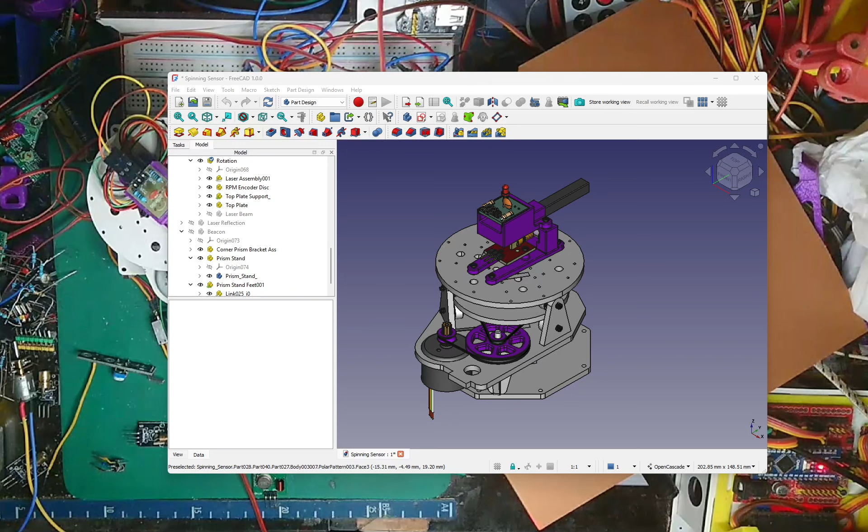What it is: a little rotary table that rotates, with a small laser down here. This shines through a cylinder lens, and what this does is create a laser beam that shines a line.

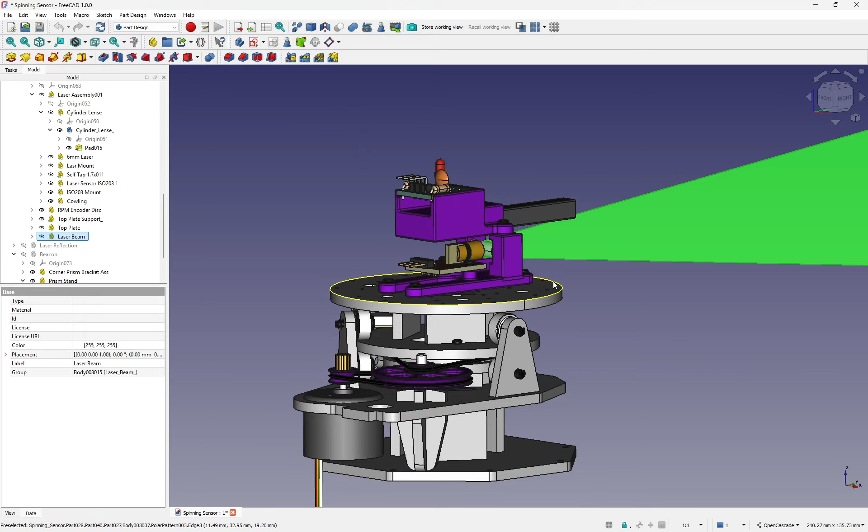So I'll just put that laser beam in there so you can see what it does. If I turn on the laser beam, the point laser, going through this cylinder lens, creates a line laser. So if you look on top, it's still a straight point in this direction, but the laser light has been spread out, so it shines a line on whatever it touches.

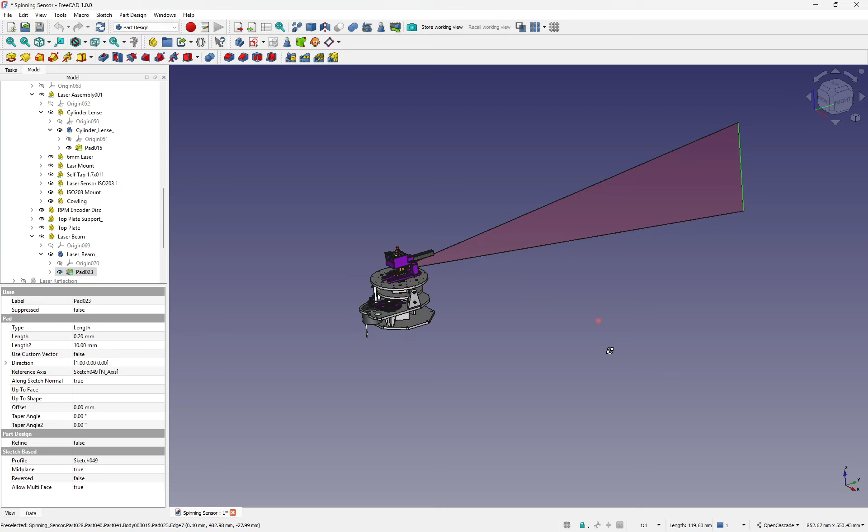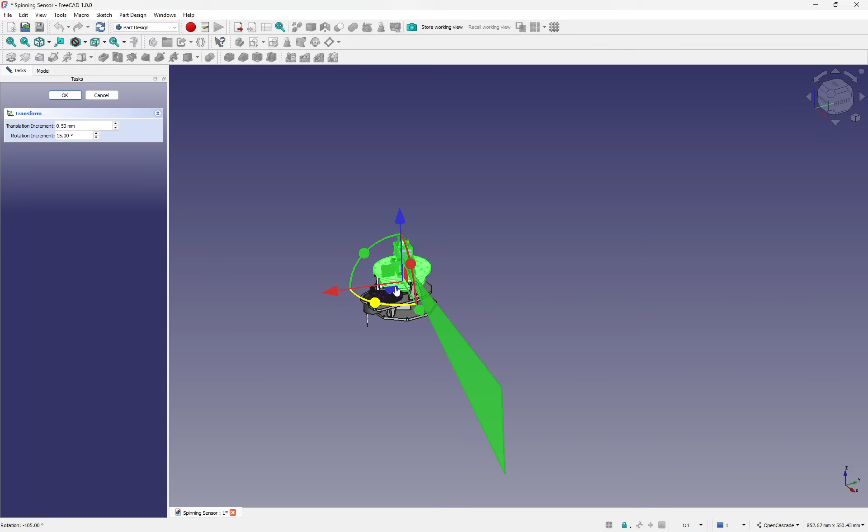And then what this does - let's have a look, laser beam, rotation, there we go. So what it does is it spins around like this, going around and shining that light as it goes.

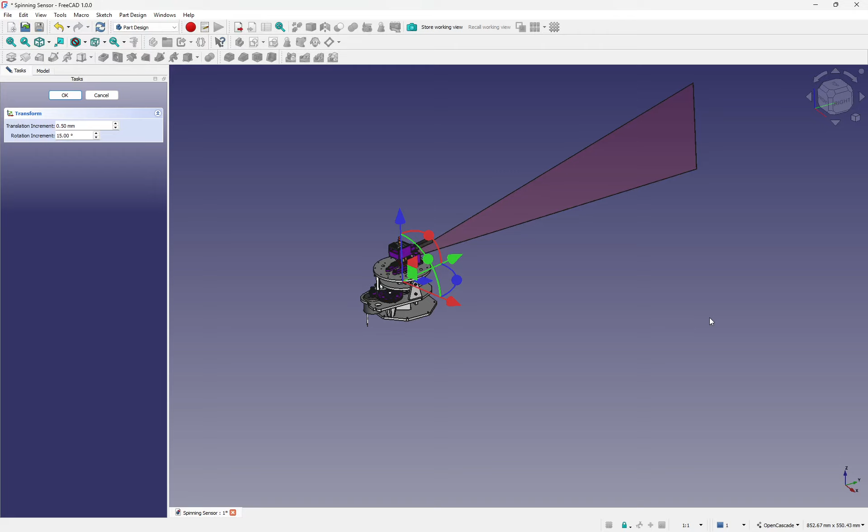And so what we do is we place 3 beacons around this module, which is going to be mounted on a robot. Basically what this does is find the position of a robot by shining this laser light on 3 beacons, which then ping a signal back to say when it has detected a beacon.

What I'll do is - this is all based on a friend's Instructable. I'll show you the Instructable because it will give you a better idea of what it is that we're doing.

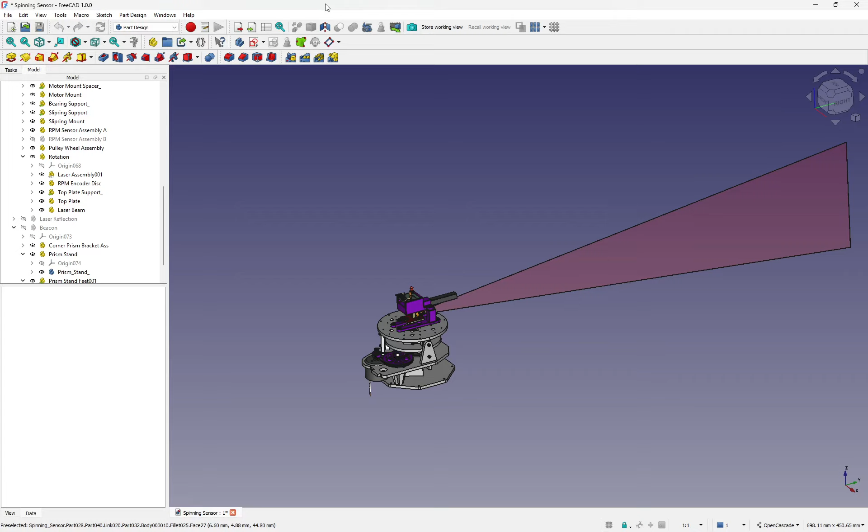So yes, I recommend taking a look at this Instructable. Just go to Instructables and search for this robot triangulation using circumcircles. He's done a very good piece of maths which will calculate its position using triangulation using circumcircles.

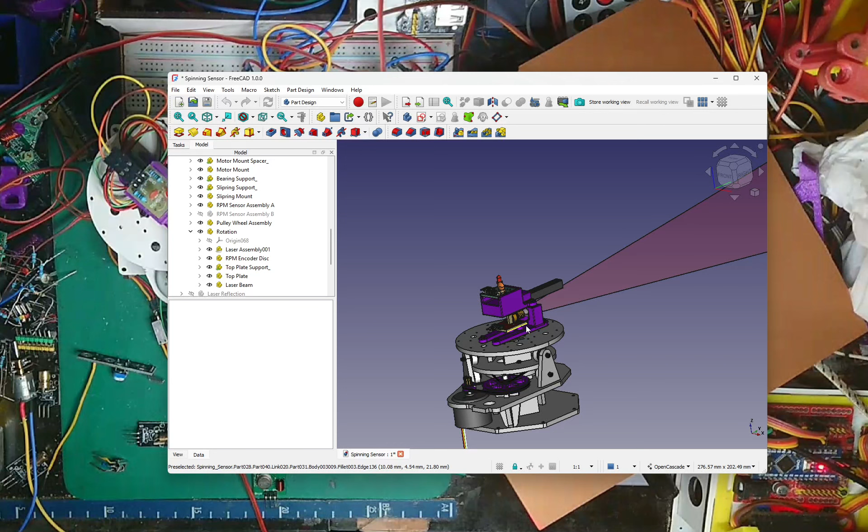So mine isn't really a passive turntable. I can actually connect things to another microcontroller that are mounted on this turntable. That's why my turntable looks a bit more complex - because I'm actually rotating things around some wires going through a slip ring, so I can connect things that are on this table.

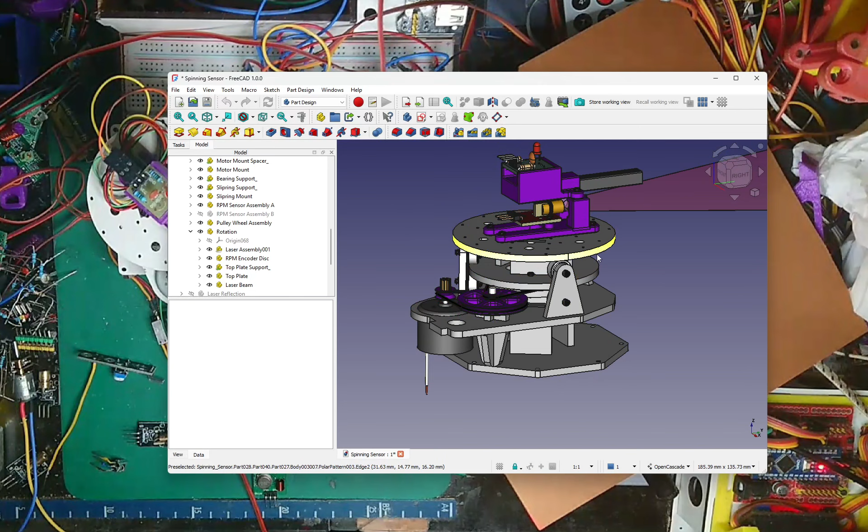And this is what it is. I'm using an ESP8266 as my microcontroller, because what I can do is run a web server. One moment - yes, there we go.

So I'm using this ESP8266 because it's got a web server on, and what I want to do is use a web page to display all the information that this is collecting basically.

Now, as I was saying before, it's been a while, because what we've been doing is trying to use these 433 megahertz radio transmitters and receivers.

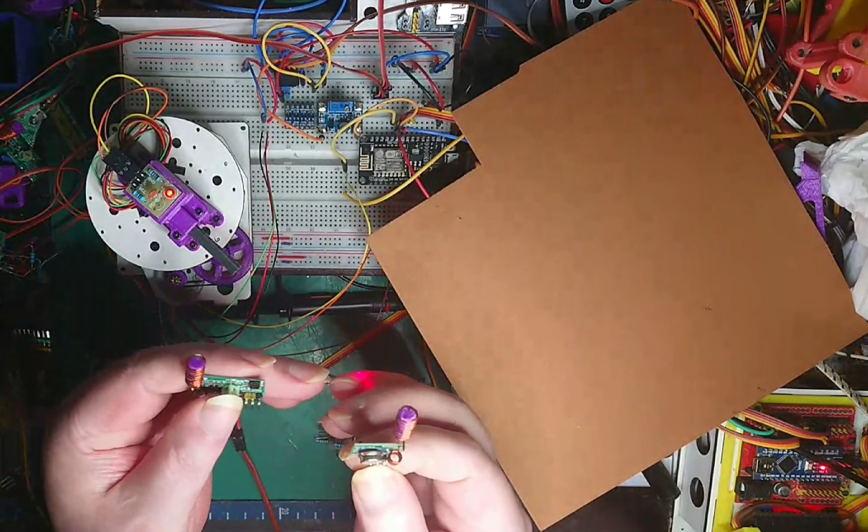I've done a video about an issue that I had with these, where the pins were actually shorted to ground, and I've removed the crystal. If you search my videos, you'll see a modification to fix this issue - if you test the output to ground and there's a short, it's actually underneath the crystal, and you need to take the crystal off and replace it.

But anyway, so what we're trying to do - let's just move that there. So that would have been tied with a sensor. So we'd have our sensor that picks up the laser coming from when the laser hits it. Can I get that? So it shows a laser.

Yeah, so when the laser hits that, what that would do then is send a signal via the radio on this 433 megahertz radio, and there would be 3 of these. So as it spun round, it would trigger 3 of these, and these would be sending a signal back to our receiver.

Now these are pretty basic receivers. I'll just bring a circuit diagram up, because what we were getting was, because there's such a large time delay between each pulse, we were picking up a lot of noise, which then in turn triggered the microcontroller.

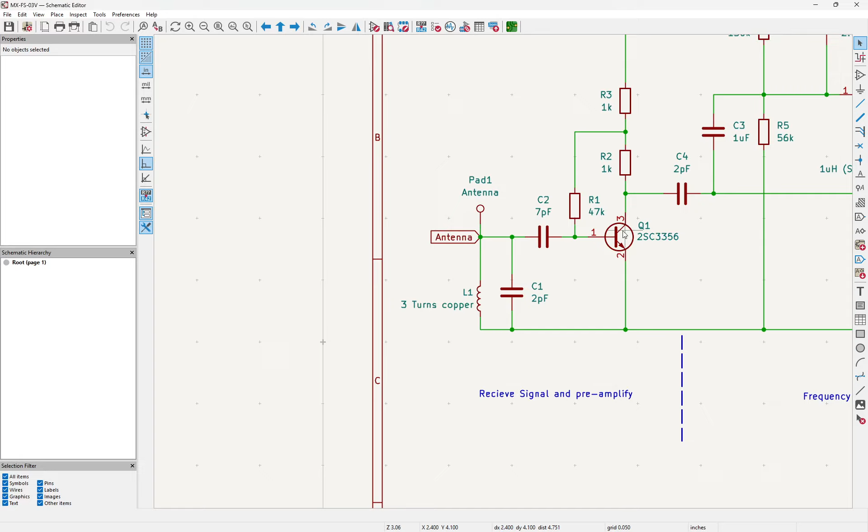This is amplified, and then it goes through demodulation where we have a matching frequency set up here, which then they merge together, so we detect the signal that we're actually transmitting. But then it goes through this filter, and the filter is pretty basic - it's just a capacitor and a resistor.

And the values of these only give you sort of a pulse width of about, I don't know, about 100 milliseconds or something, and then it just starts getting corrupt because of the capacity. Basically, it acts a bit like an RC circuit, but it's more of a filter.

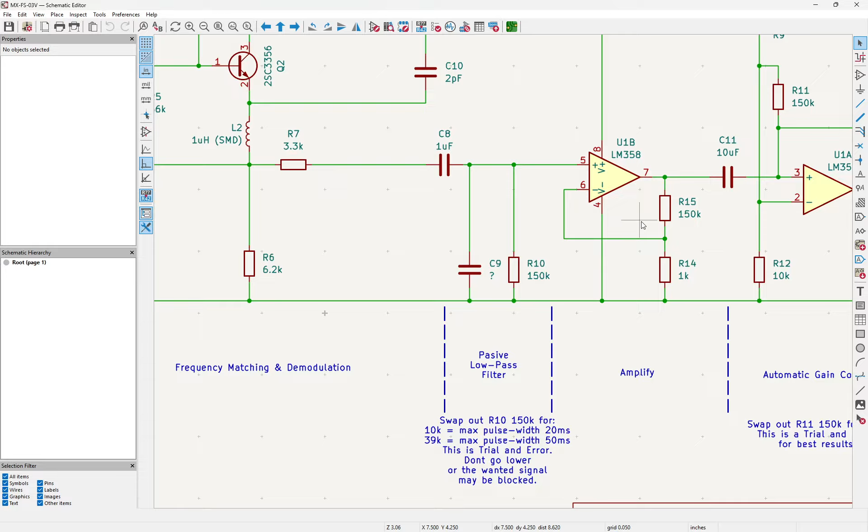And then it gets amplified. After amplification, this has got an auto gain, so when it's quiet it sort of bumps it up. What I've done is I tried modifying the gain to give it a cap, but that didn't work. I also reduced the pulse width of the signal, so it would only accept signals of a pulse width less than about 20 milliseconds - anything more than 20 milliseconds it would ignore.

And it sort of worked, but at that point we were having another issue. So I gave up with them because I was having headaches trying to overcome the noise from the signal, and eventually, in hindsight, what I found was that the majority of it was down to ambient light from the sun.

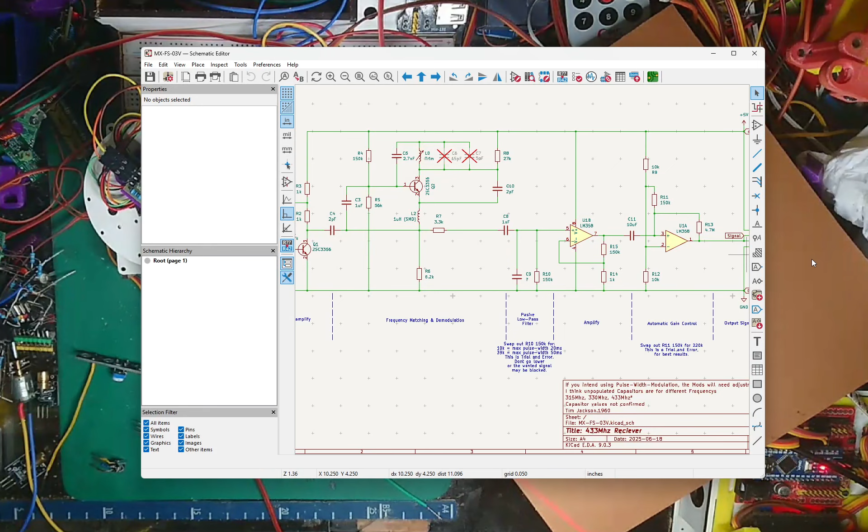I didn't notice, but when the light was shining through the window - these sensors, where are we? Yeah, these little sensors - let's get some focus on that. Yeah, I've painted it black.

Well, the transparent one actually - I don't know if I've got one. No, I haven't got one to hand. But they come transparent, and basically the plastic is supposed to filter the wavelengths you don't want. But I found that sunlight has every wavelength under the sun. So anyway, that's why I painted them black, apart from the lens at the front.

And so what was happening was when the sun shone and it reflected around the room, this was triggering from that. If I'd noticed that earlier, I would probably still be going with these radio transmitters. But I've moved on from there - like you do, you keep iterating and go from one thing to another.

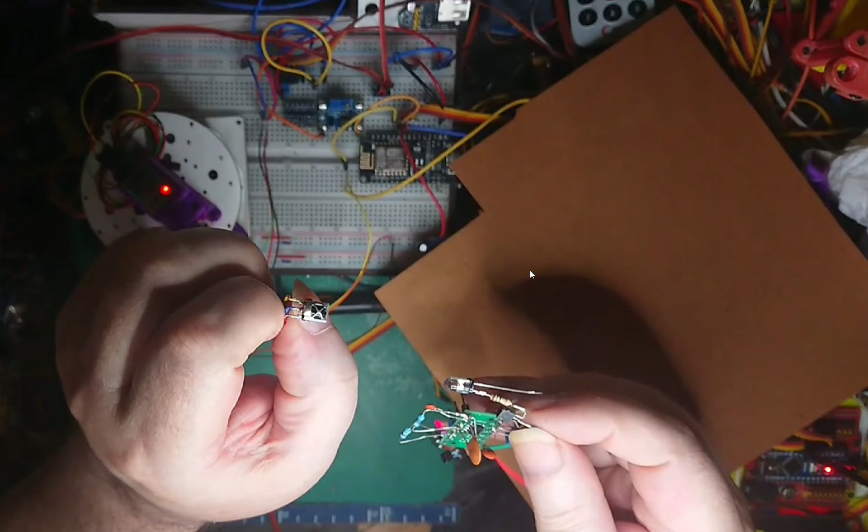Basically, it's a carrier for the infrared, so this will then transmit at 38 kilohertz. And because it's transmitting at 38 kilohertz, I can use one of these receivers, which is a standard NEC receiver, which has a filter to filter out other light sources apart from infrared, and it has a demodulator inside to demodulate the 38 kilohertz to a single pulse.

So basically, I'd changed from the radio setup to infrared setup, and this was working quite well. But of course, I hadn't realised that this was the issue with ambient light. Anyway, so I was still getting exactly the same interference.

So then what I did, I went a different way again. Instead of this picking up the signal and sending it through this 555 timer to create a carrier wave for the infrared LED to be picked up by this, I'd have three setups of this and just one of that.

It just hit me that I can put this 555 timer and pulse the actual laser. So the laser is being pulsed - let me just get a focus in there. Yeah, so I was pulsing the laser through this at 38 kilohertz.

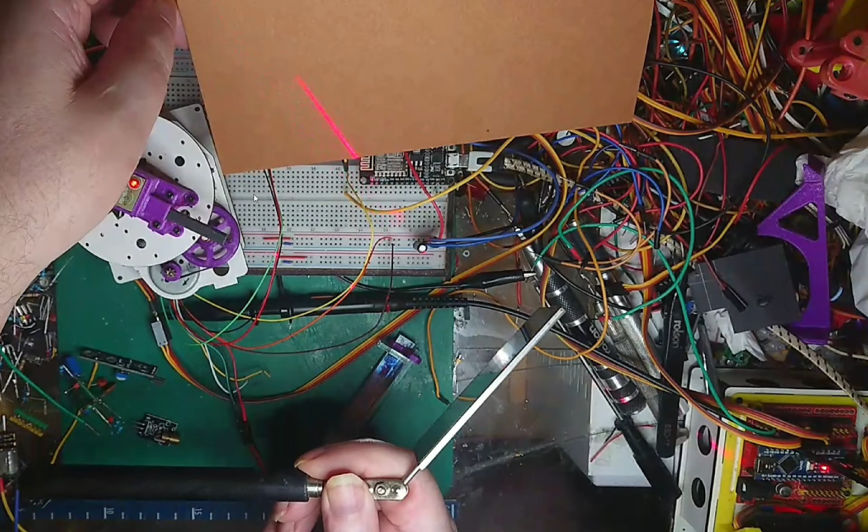And then when they hit a mirror, if I put a mirror here, let's get it in shot, if I put that there, and my laser light will come - let's just get that sort of right, there we go. So my laser light comes out of here, hits my mirror, and then gets reflected back.

But the next step is to get the light - when this laser rotates, you can see that the light is reflected back in exactly - let's see if I can get that down there. Is that showing up? So I've got my laser light coming.

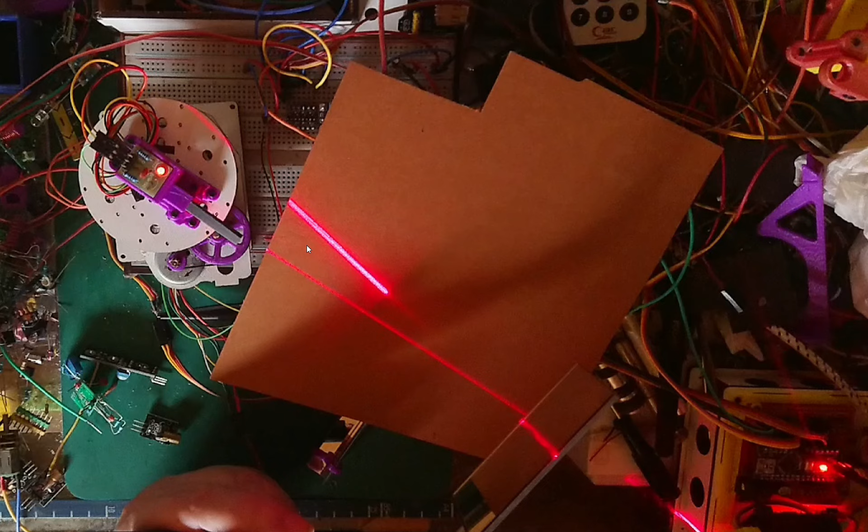I'll just turn the light off for this bit, then it'll show up a bit better. Let's see if I can just get a bit not so dark. Alright, try and get it to focus on something. Nope. Right, that's better. Right, we'll leave it at that.

So as this rotates, my laser light is rotating round, and you can see that it's going into the mirror. And if the laser is not lined up perfectly, let's just move that round a touch. There. So you can see that the light comes in, hits the mirror, and then gets reflected off.

But as the turret rotates and it becomes aligned with the mirror perfectly at perpendicular, you can see that the light is being shone and comes straight back.

So then this sensor will then activate, knowing that I'm in the exact position. So as it comes across, you can see the laser light going, it hits and activates and then deactivates as it continues. I hope you can see that. But we have an issue with this.

Because the robot is going to be moving around, it can be in different positions relative to the mirror. I'll move the mirror to show what happens. If the mirror moves, if the robot moves, you can see the reflection changes as the robot moves, and basically the only time it's correct is when it's perpendicular, at 90 degrees to the light. If the robot is at an angle to the mirror, this isn't going to work, because it won't hit the mirror and line up.

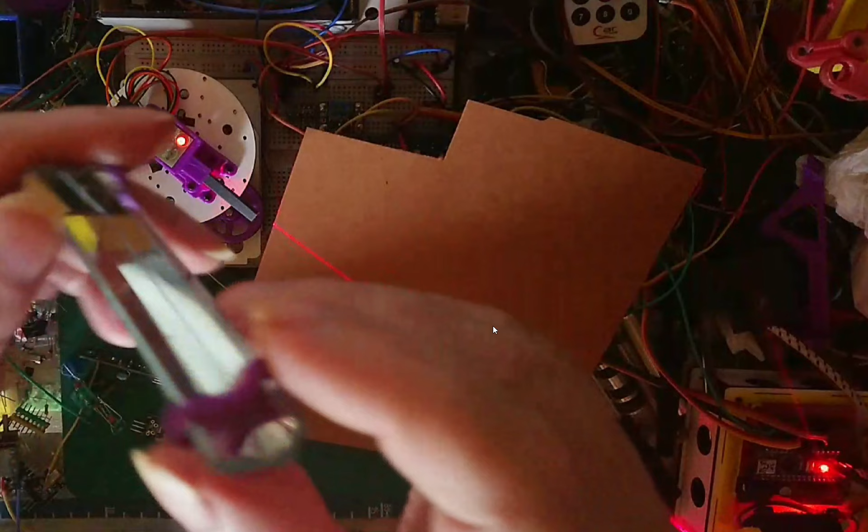So there's a special mirror we can use. To show this, I'm going to go 2D first. Can you see this? This is a mirror - actually two mirrors, held together. Let's turn my light back on now. Oops, sorry, I've just blinded everyone. There we go. So we've got this mirror, and I've held two mirrors together at 90 degrees to each other.

This is how cat's eyes work. You know the cat's eyes in the road? When you're driving down the road and your headlights shine on a cat's eye, the light is reflected directly back towards the source of the light. This is how cat's eyes work - you can either have a round one or two flat ones.

I want to try and demonstrate this and show you how it works using my laser. I'll turn the light off again and try to get a decent colour temperature - I think that's more like it. There we go - nope, shouldn't have clicked. Let me try and get onto this board.

Has that got it? Yeah, it looks a bit crap, that, doesn't it? Anyway, you can see the laser quite well. So obviously this mirror, if I hold it horizontal, we can have it in that direction or in that direction. If we have it in this direction for the laser to come, I should be able to show it.

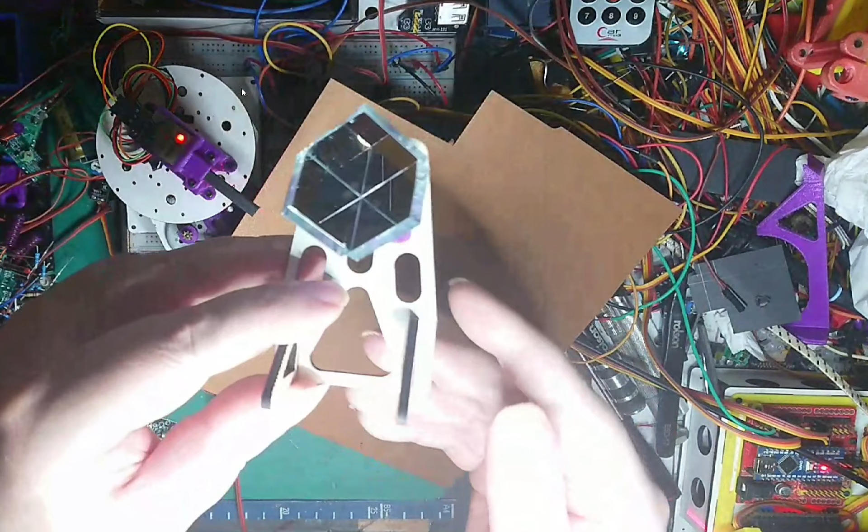These are my beacons, and these are my mirrors. Now I am going to put this underneath the camera. I don't know if you can see there, but let's see if I can focus on it because it's the camera lens I want to show you.

I wonder if it'd be better without... I don't know if you can see there, but in the middle of that is my camera lens, right in the middle, because basically any light - you can see a few images of it. I don't know, maybe I should put a ring around the camera lens. You can sort of see it there in the middle, the whitish bit is actually my lens.

Now if I tilt this, the lens, the camera is always going to be in the middle, because the light shining to the lens, or the reflection of the camera, will always stay in the direction that the light comes from. So basically, what I'm trying to show is that this lens can be at any angle to the laser that's going to come out and through here.

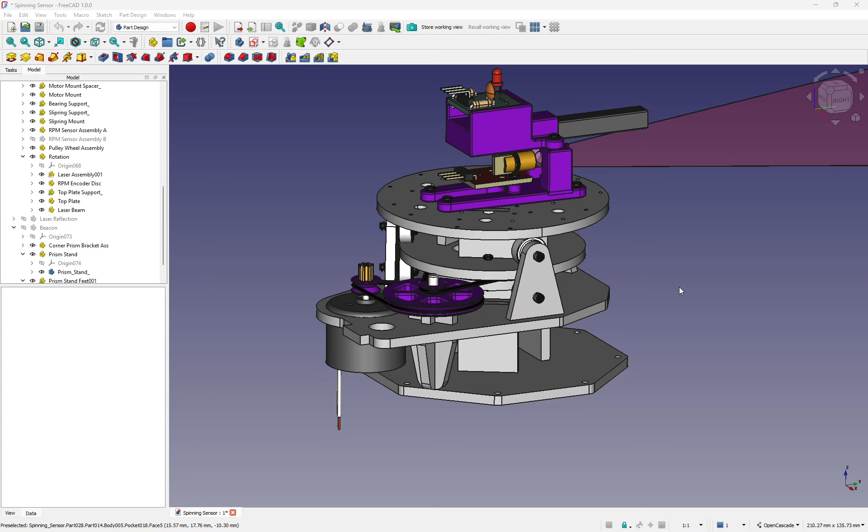Just give me a minute. Right, okay, let's see if I can show it a bit better on my CAD. Hopefully I can show it better here. So the setup I've got at the moment - I've got my rotating table, and I've got my laser coming out, giving this line of laser light.

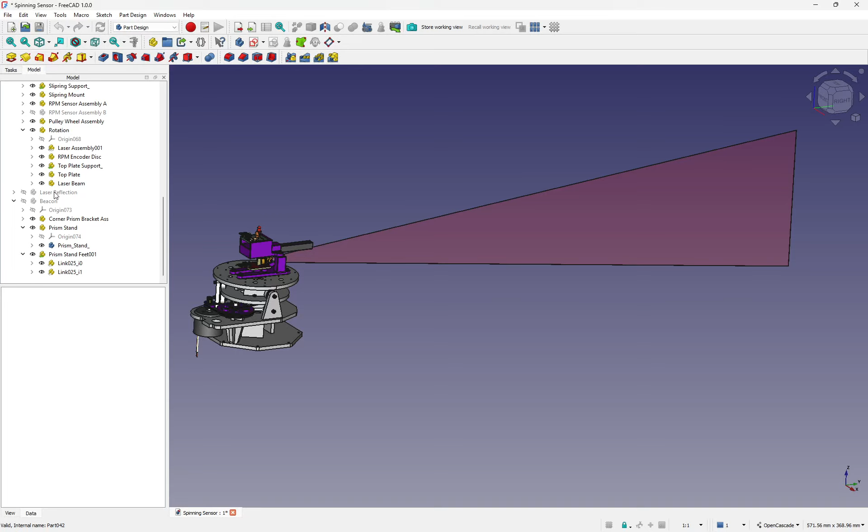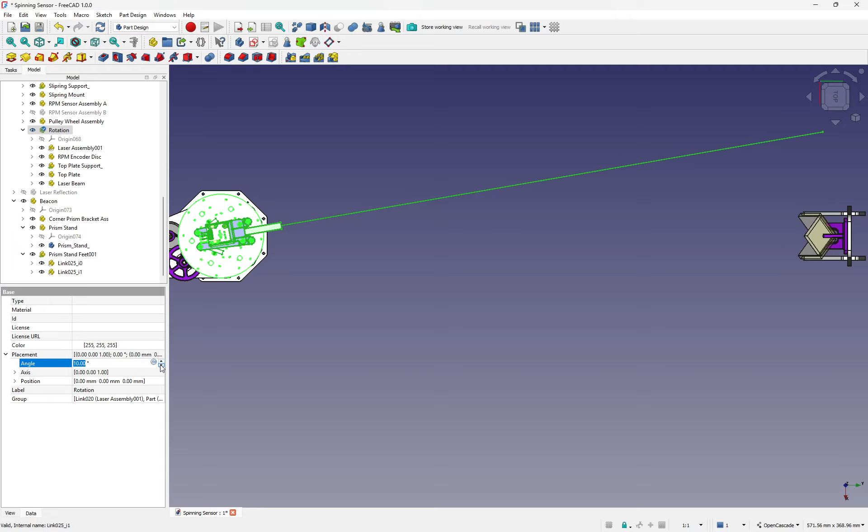And then what we can do is I can put my beacon in front of this laser light. So if we look on the top, we have our laser. Let's just go like this. So as my laser's turning, it will actually hit the - let's call it a prism for the sake of it.

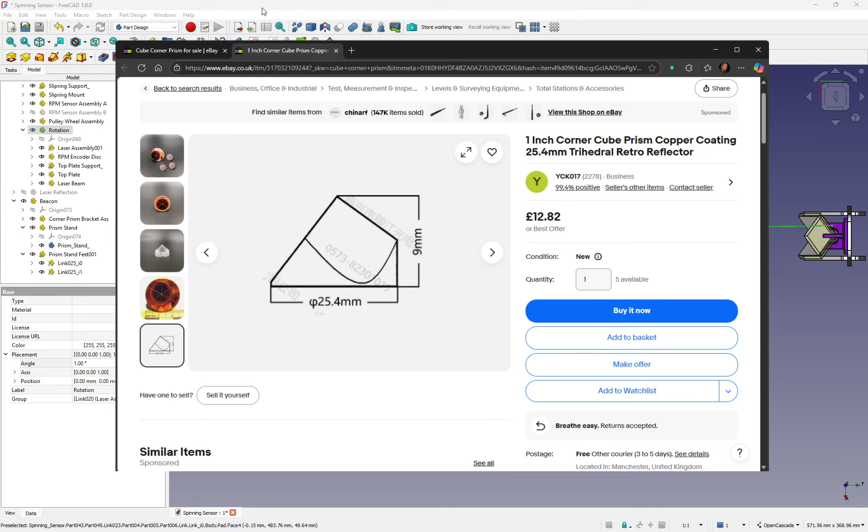It's 3 mirrors, but let me just show you one moment. Yes, these are what they are. What you can actually do is you can buy these - the thing is, they're a bit on the pricey side. Oh, you can see it better there. Basically, this is a prism where you've got like 3 sides that have been ground away to form the internals. So that, if you can imagine, this is a prism.

But I need 3, so you're talking 38 quid there for these. But I actually had some mirrors, and they're actually special mirrors. Let me just see if I can.

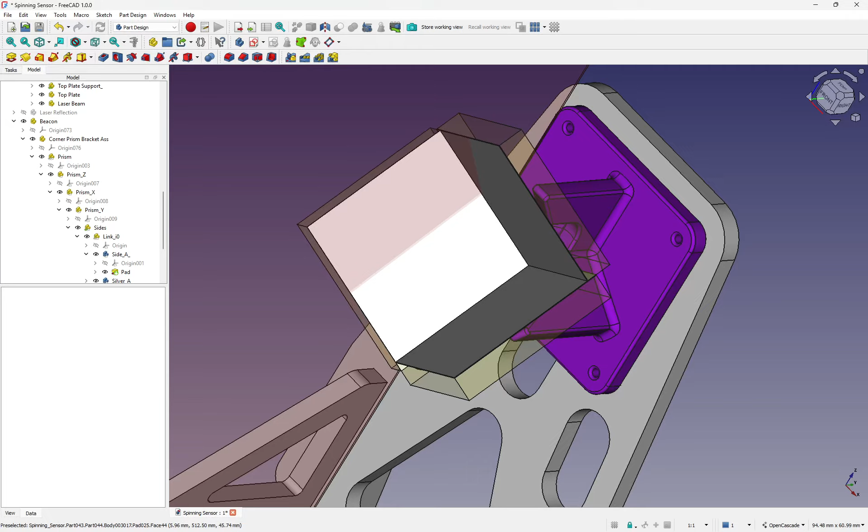They're called first surface mirrors because the actual surface is on the front and not the back like normal mirrors. I got these out of some old flatbed scanners back in the days when it was all SCSI and stuff - really old flatbed scanners, not today where we've got LEDs. This is before the days of LEDs. I got these out of old scanners when it used to be the cathode, the fluorescent tube and mirrors reflecting. I've actually made these up myself because I had them, but as I say, you can actually buy them, and these are what they look like. The price is stupid, I would have thought they'd be a lot cheaper by now.

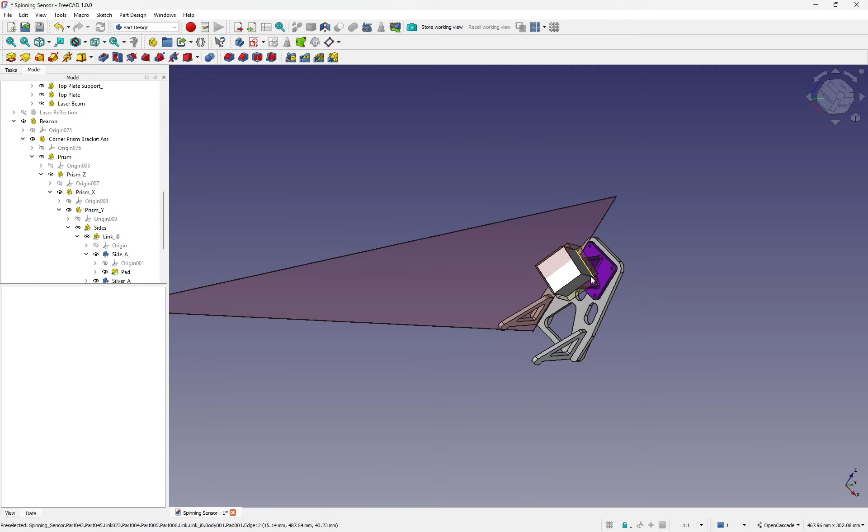Anyways, so let's continue. I just wanted to show you what they are, and that you can actually buy them instead of having to make them. So if we look on top, as the laser comes in...

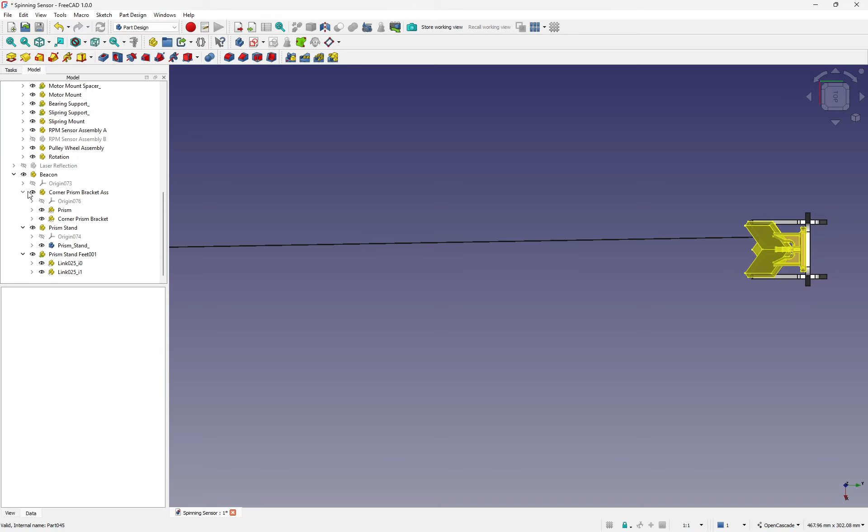The light is going to be shone exactly the same direction it comes in. So if I put on the reflection, where are we? I've put this somewhere - that's my rotation, that's my beacon. Oh, laser reflection, there we go.

So yes, if we take this - where are we, there we go. Right, so as it hits the mirror, when it hits the mirror, there - oh hang on, can I make that not 0.1? When it hits the mirror, there, let's make that 1. It's the mirror there - it's going to reflect exactly back the way it came.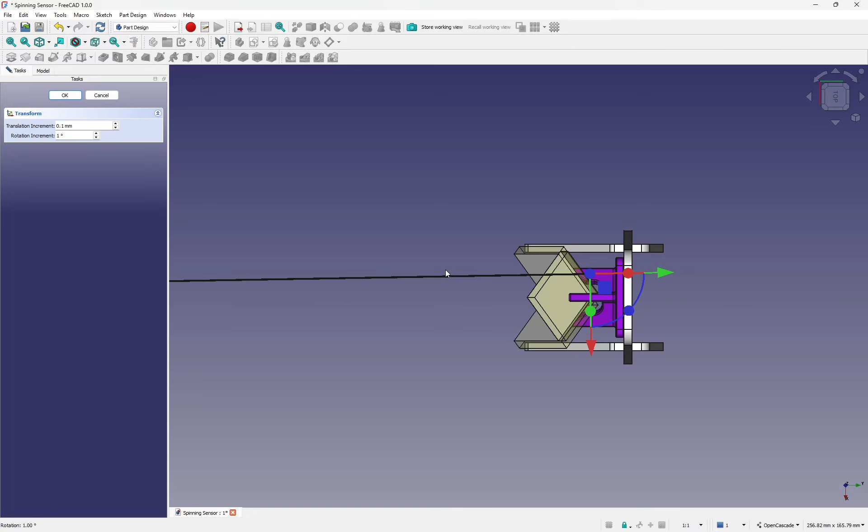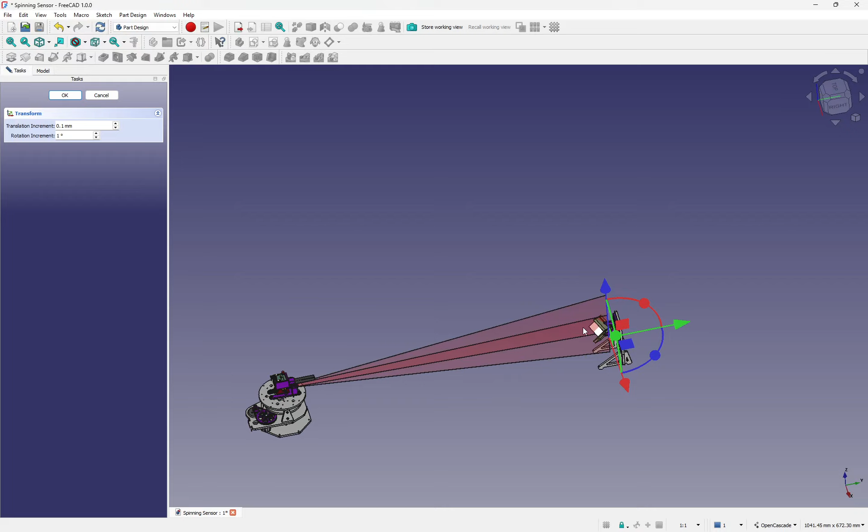So it's going to come back right into this sensor. As soon as it hits the mirror, it's going to reflect around and come back exactly in the same direction. Well, actually, it's not - sorry, I've got that wrong.

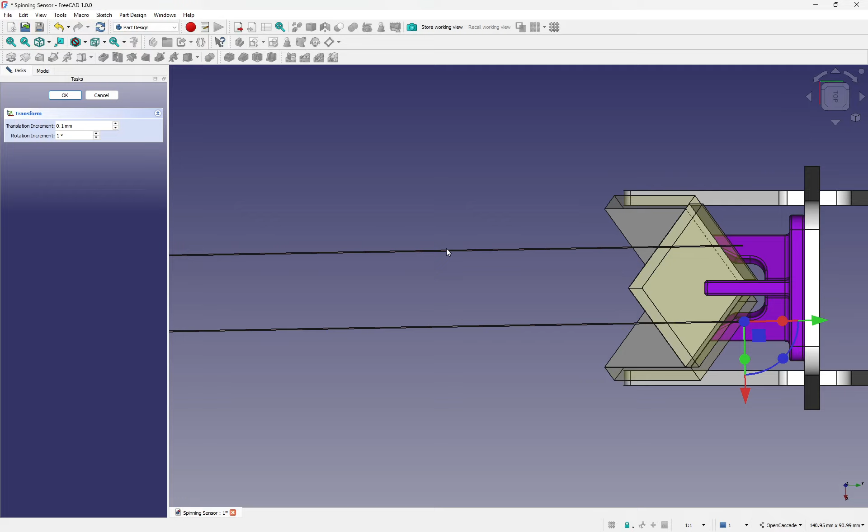Right, when it hits the mirror, it's going to be coming back in the same direction it's coming from, but when it hits it, it'll be there to start with. So if you imagine my sensor is in the same place as the way I'm sending it out, that sends the light outwards. It reflects off this mirror here, or it could be this top mirror, and it goes down to the bottom mirror, but basically it goes in and then comes across to this mirror, and it comes back in exactly the same direction it's coming from, but it's slightly offset because it's on this side of the mirror.

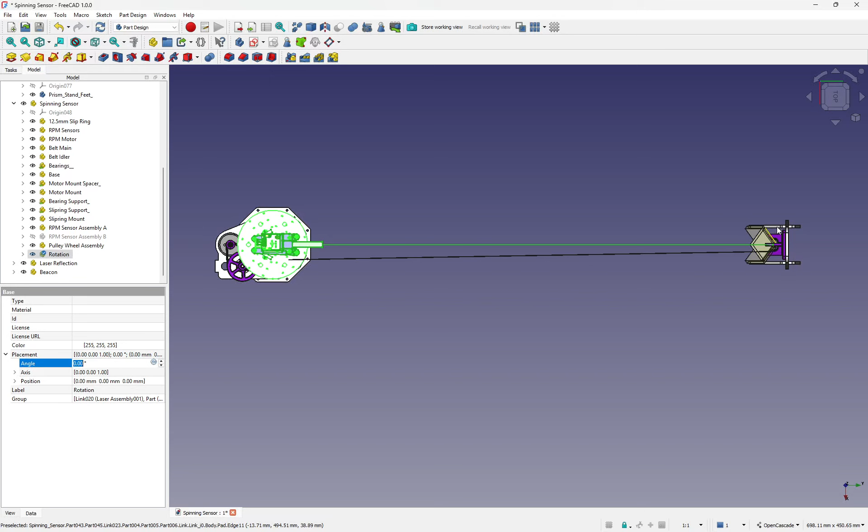But as this rotates, let's just go okay with that - as this rotates here, let's just try and get that rotation. There we go. As that rotates towards the center, so if we go like that, and now it's on the center, you can see - where's my laser reflection? You can see that it's reflecting on this mirror right at the point, so this is actually going to come back from this point, and it's going to be in the right direction.

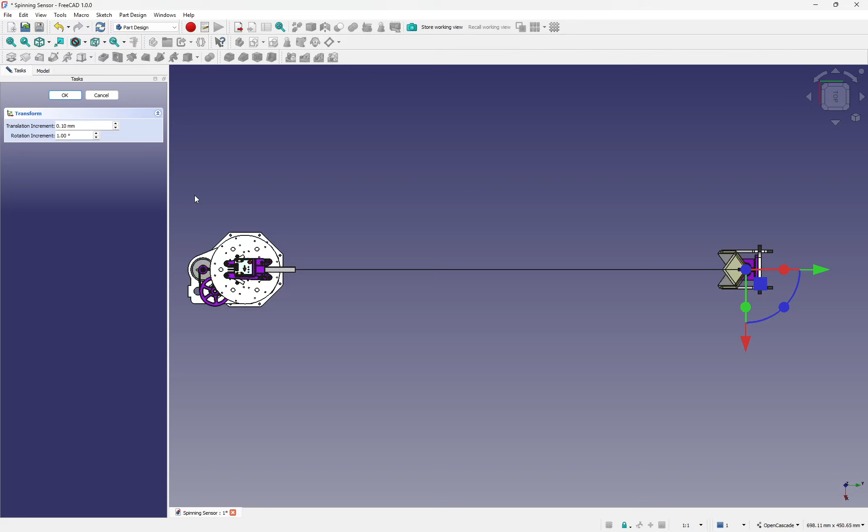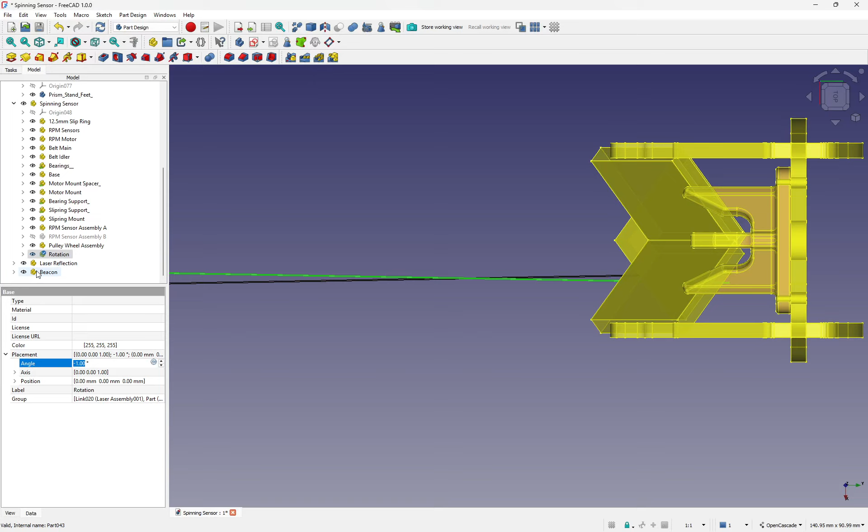And it's actually going to hit the sensor as it rotates. And then as that rotation continues - where are we - it continues round, this actual rotation follows it. I should have actually put that on the end of there, really, shouldn't I? Yeah, so this actually - there we go. So as this moves across, this will be then reflected - sorry, this one will then be reflected across to this side of the mirror, and this will end up over there going at that angle, because it's coming back in the same direction.

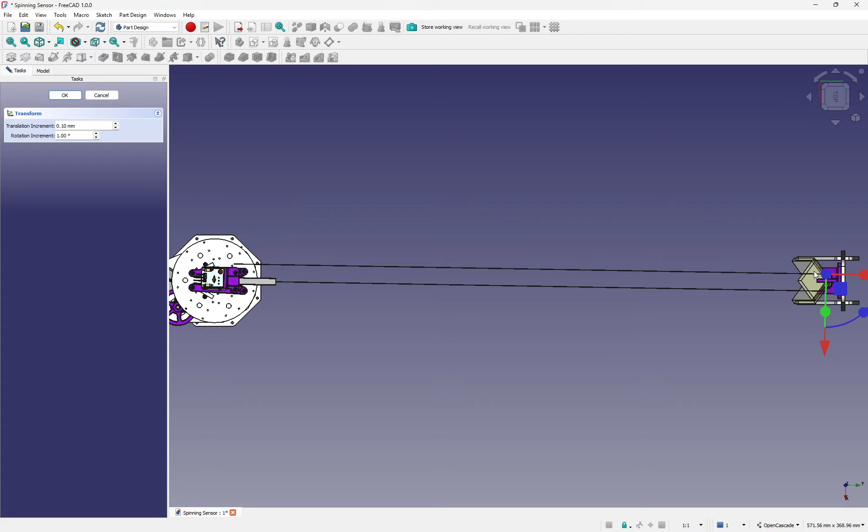But because it's not in the center of the actual mirror, it is actually getting reflected here and there and coming back. But when it comes back, it actually misses the sensor. So it's only when it's truly lined up that the actual signal comes back true and hits the center in the middle. And to ensure that this happens, let's just get all my drawings back to normal.

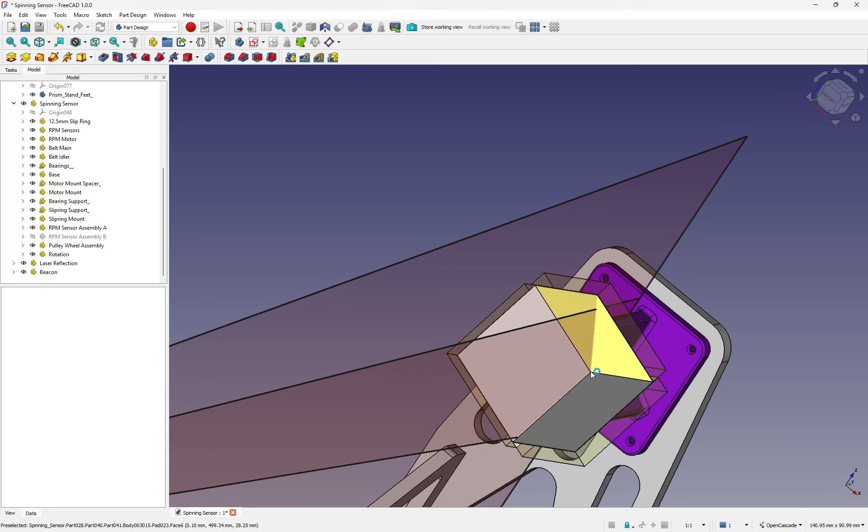There we go, and get that rotation back to normal. To ensure this happens, what I have done - when it's exactly in the middle there, it's actually getting it right into that corner point right there, so it's in this area, so there's no offset. If it was hitting over there, there'd be this big offset, but at that point there's no offset, so it's coming back exactly where it came from. And to make sure I have no ambient light, I've stuck my sensor inside this box.

That's the wrong thing.

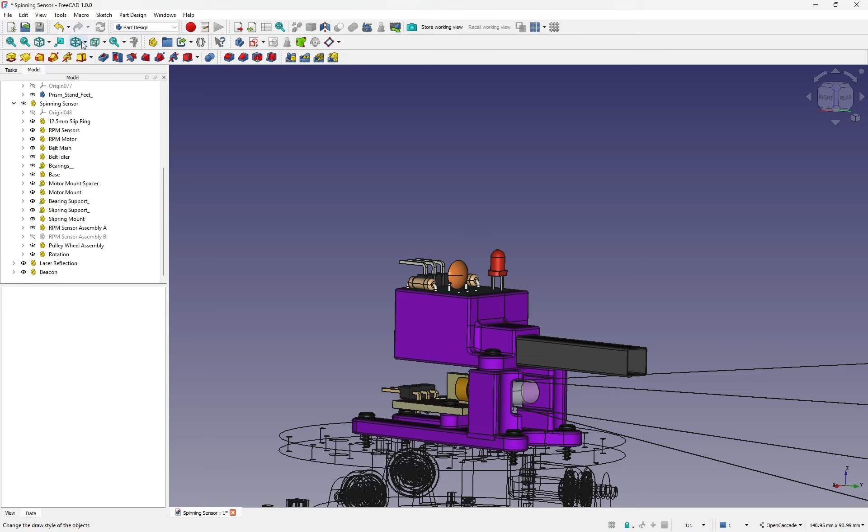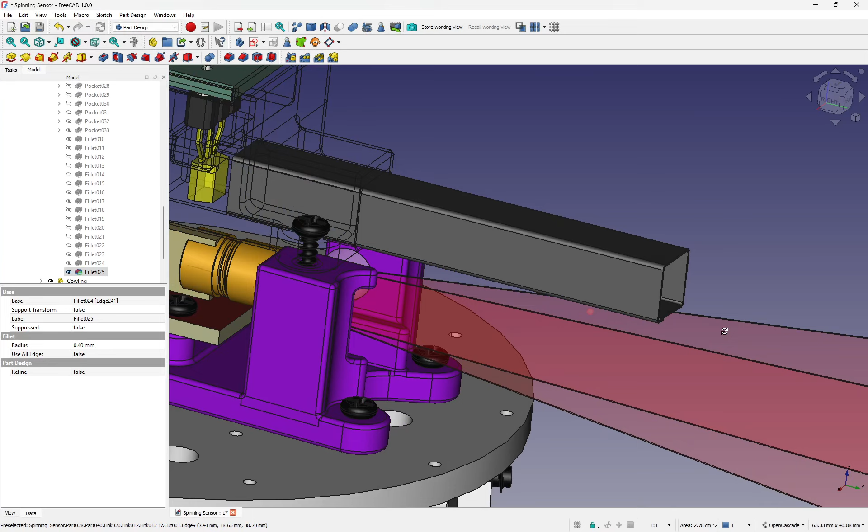I've stuck my sensor inside this box, which is sealed from ambient light, and the laser has to come down this tube to hit the actual sensor. So any ambient light coming in from any other direction should not be affecting this laser.

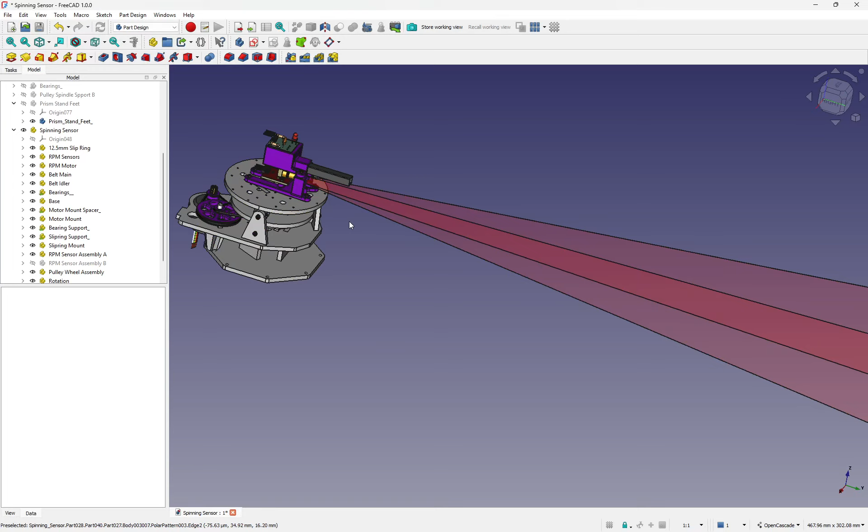So I hope that made it a little bit clearer how it knows when it's precisely in line with the beacon. But if we look on plan, this will still happen - let's just get my beacon and transform it. Even if this beacon is slightly out of alignment like this or like that, it will still reflect it back in the same direction it came.

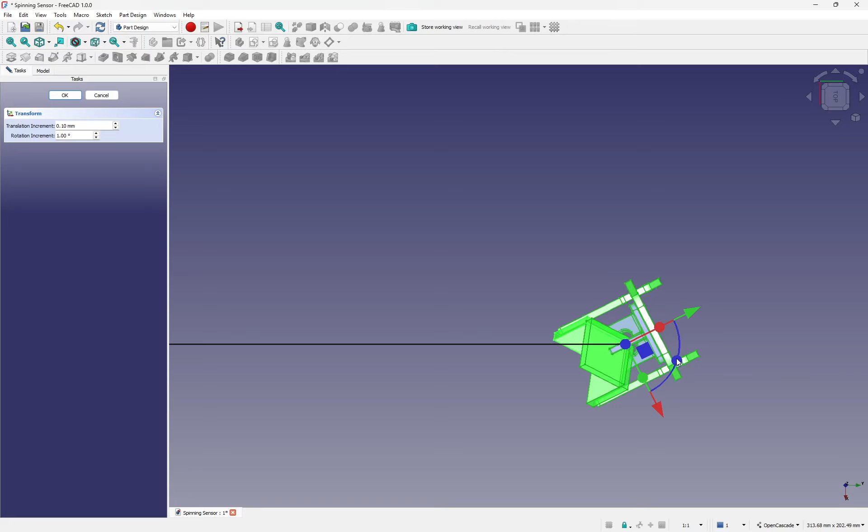But obviously still with the offset as well, because it's going from one mirror to the other. What happens is, because the mirrors are on a slight angle, the refraction on this mirror is different, and gets the reverse done to it on this mirror, because it's going in the other direction. So the two refractions total up to the same refraction as if it was straight on. You get an increase in angle on one side, a decrease on the other, or going the other way, a decrease in angle on that side and an increase on this side. But they both total up to the same angle, which is 180 degrees backwards.

One moment. Right, I just want to point out one thing. On my rotating table, as it rotates, let's just go there again. What I have is a little hole here on this disc, and I have a sensor here, so when it rotates round, that hole lines up with that sensor and it pings a signal.

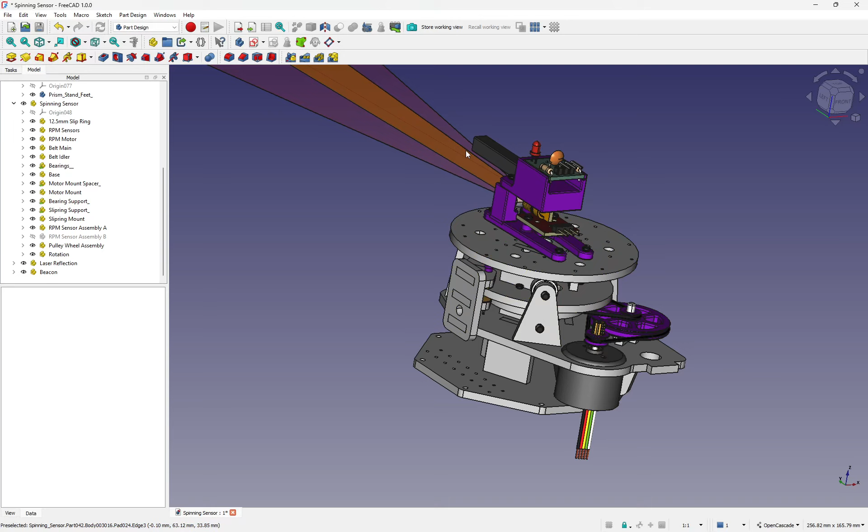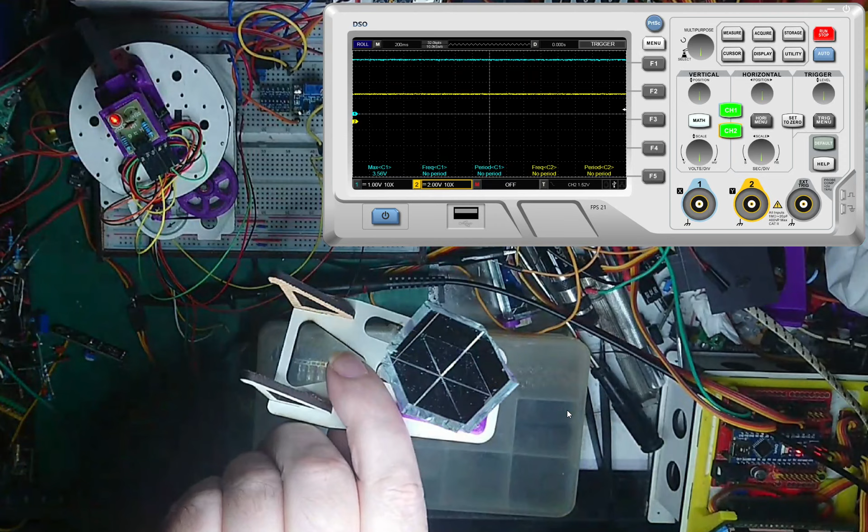So I've actually got two signals coming from this. I've got the signal when this has done a full rotation, and I've got a signal when it hits a beacon. And what I've done is I've put both these on my oscilloscope. Let's just bring that back.

I will start this spinning, and what I've got is the yellow trace which is going to the sensor on the disc for one full rotation, and then the other blue one, or cyan, is when this beacon actually hits and gets reflected, when the beacon reflects the light back. And what I'll do is I will actually move this around to show you that it doesn't alter the signal coming back. Let's start it up.

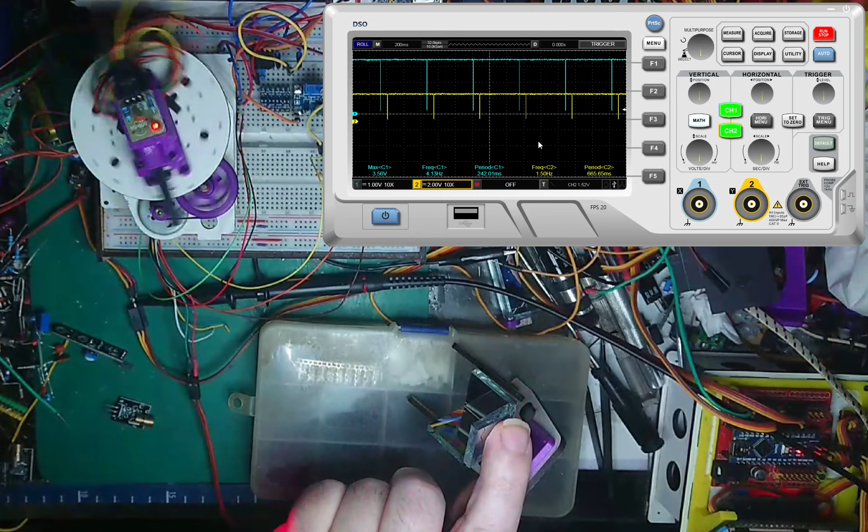So there we go. The yellow trace is when it's pointing in this direction - when it's pointing towards my finger, that's the yellow trace. And when it's pointing to the beacon - well, I'm calling it a beacon, but it's actually the crystal, it's the mirror. So what I can do is zoom in.

Channel 1, channel 2. Very well. There we go, normal. Right, so...

Right, so you can see that my mirror, if I move it in one direction like this, closer to this point, we get closer to - I'll call it the datum on the yellow. And if I move it round, you can see that it moves further away, like that. Because it's taking longer from the pulse from the mirror to get to where the datum is.

So what I'll do is just leave it here. Tell you what, let's put it sort of in between there. Can I zoom in a bit more? It's a bit better. Right, so I'll just move it out a bit.

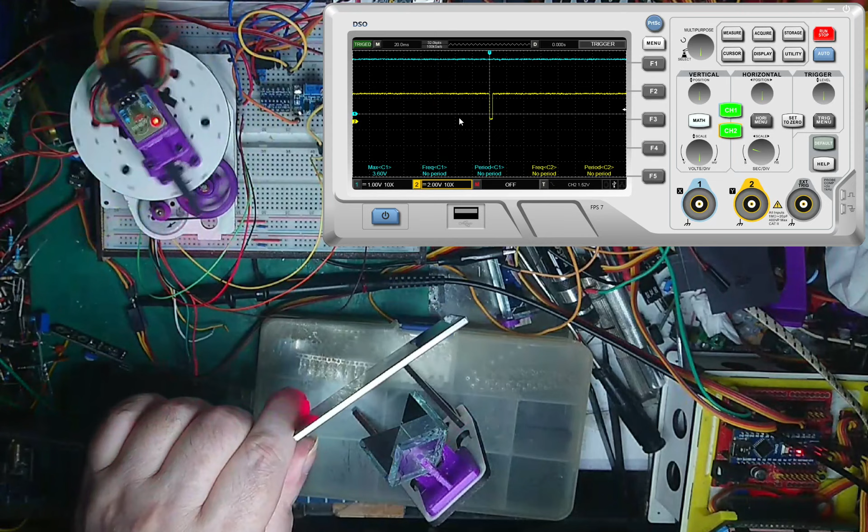Well, I can't, I'll tell you, it's that hard. I can't even line it up myself by hand. I'll be lucky to get a spot, I think.

But obviously, the other mirror, that doesn't matter if it's rotated. Okay, so yeah, that's what I wanted to show.

And so I'm still working on this project. I'll tell you what I haven't done - I haven't set up, no, there's still a bit more. Yeah, I nearly forgot, right, I'll set up two more of these beacons or reflectors. Just give me one moment.

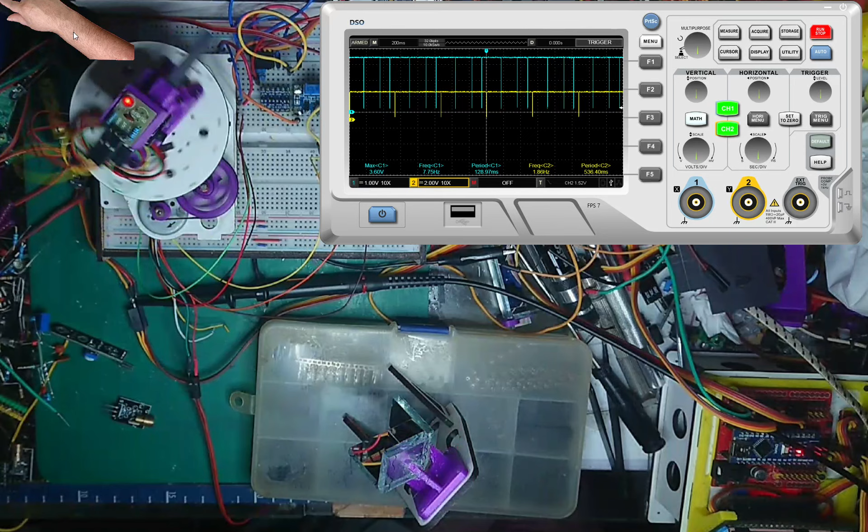Yeah, okay, so you can now see 3 pulses. I've got another beacon. Right, so there's one beacon, which is just before the datum, and then as it goes past the datum, there's another one there, which is a bit out of shot up in this direction, and the other one is still out of shot in this direction here.

But you can see the 3 pulses, the 3 pulses in between each revolution. There's 3 beacons being pulsed there. So from them 3 beacons, we can measure the time between each pulse.

As it rotates, what we do with those times is we send them to an application. And the application I have is a web page on this ESP8266. There's actually a web server, and it has a web page on it, and we can have a look at the web page on this microcontroller.

One moment, I'll get it. Right, here it is, this is the web page. I just typed in this to get to the web page. So basically, my browser on my PC is actually connecting to the ESP through Wi-Fi.

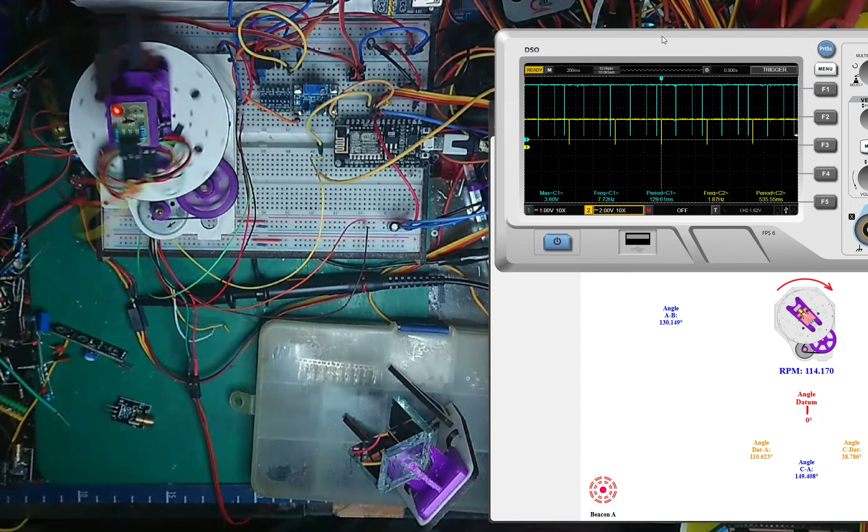Well, actually, the Wi-Fi on here is connecting to my local network, and on my local network I'm connecting to the ESP8266. You can do it either way - you can go direct if you want, but that's the way I've done it.

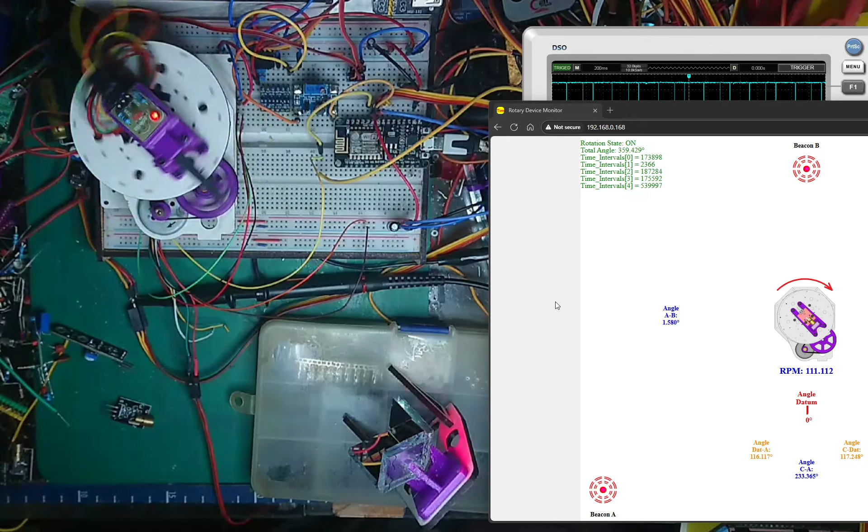Anyways, so what I've got is this web page which I'm looking at - the ESP8266 has sent me this web page, and what this web page does is every second it asks for the times that we see here. So every time it starts at this pulse, then it asks for the time between there and there.

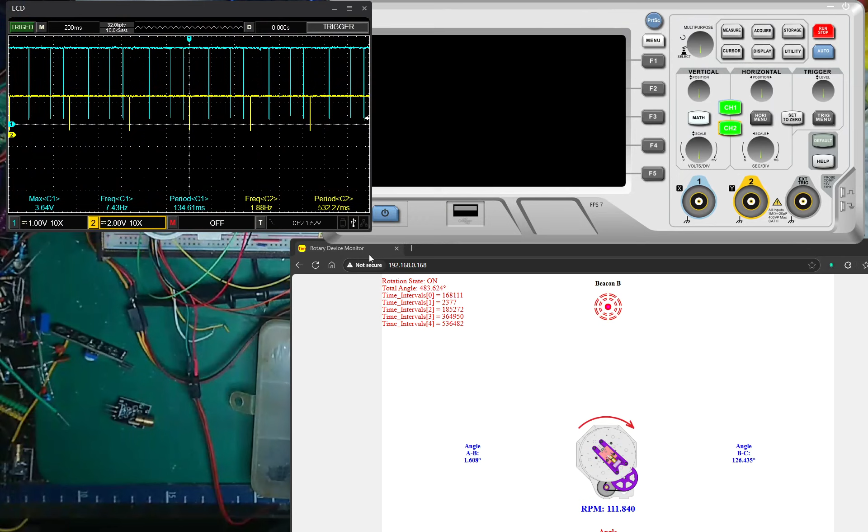Let's make that bigger. Right, so there we go, so we have this. This is my datum pulse, which is every time this pulses, it does one revolution. And then what we do is we look at the time between the start of the revolution and the first beacon.

And then we look at the time between the first beacon and the second beacon, then the time between the second beacon and the third beacon, and then the time from the third beacon to the completion of one revolution. And we just keep repeating that, so all these should be exactly the same because nothing is moving basically.

So this is what my web page is asking for, it's asking for these times as it pulses. Well, oh, I wonder what the hell that disappeared then. Right, so yeah, let's get rid of that.

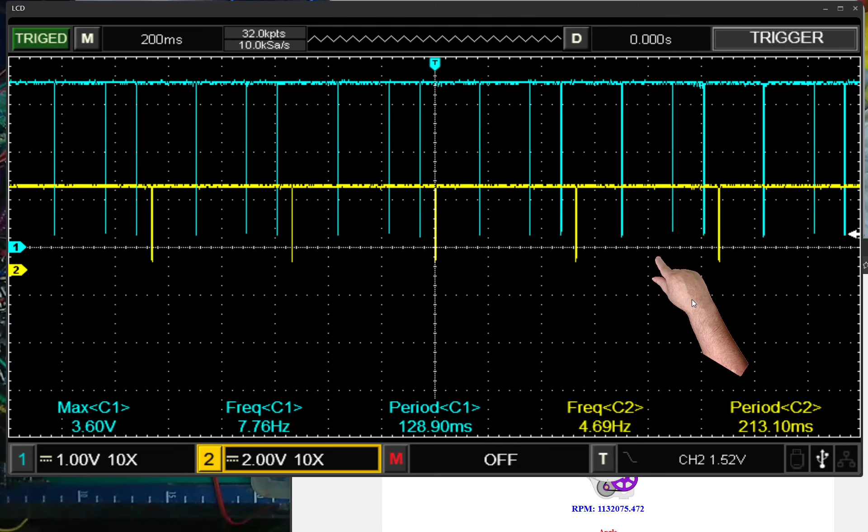So yes, and we can see them times coming up here. So this is just a bit of code to tell me that it's actually spinning. What I've done is if you look at my little picture of my rotating thing, I did a picture, and you can see that it's rotating.

And if I turn this off, there we go, it says it's off, and my little picture stops as well. So that was just a little thing I wanted to do on my web page, just to practice and see if I could do it, sort of thing.

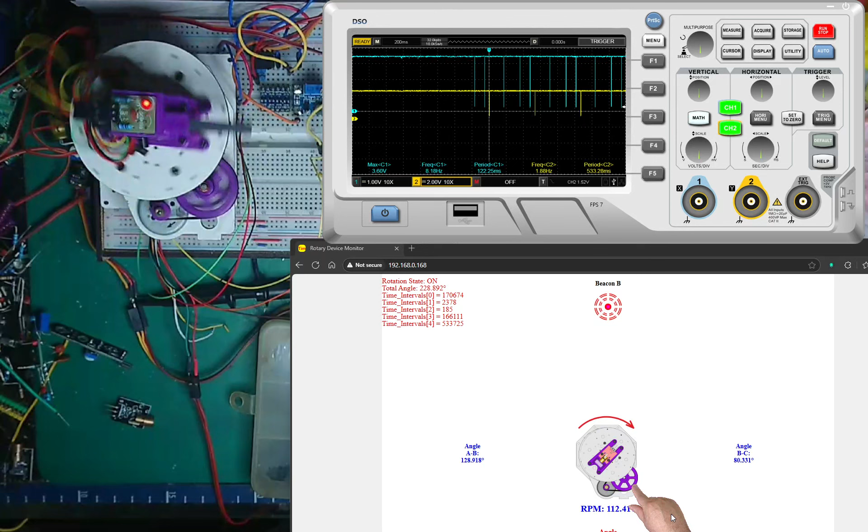So I've got my thing. If I turn this back on again, there we go, it says it's on, and my little picture shows the little wheels. So you've got that spinning, and you've got even that little wheel spinning. So I thought that was pretty cool.

Anyways, so there are the times. We could measure these times, but what happens is this web page asks my... one moment.

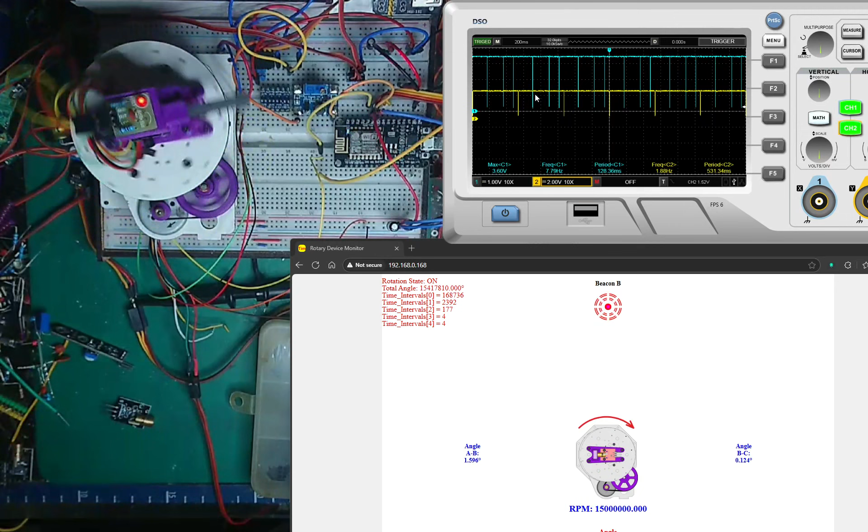This web page asks the ESP8266 what these times are, because every time it pings, it does an interrupt on one of these pins, and it records the time between each one. And that's what we have here.

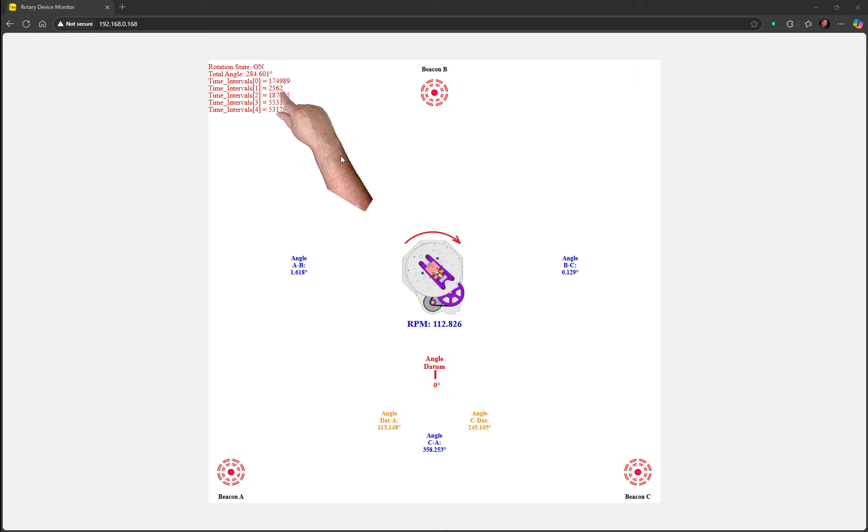So here we have our total angle, which is all these angles added up. I have a check angle, which is a complete full rotation, that's how long it takes to do a full rotation. And these, so from 0 to 3, 0, 1, 2 and 3, those all should add up to this, and if they don't, we've got an issue.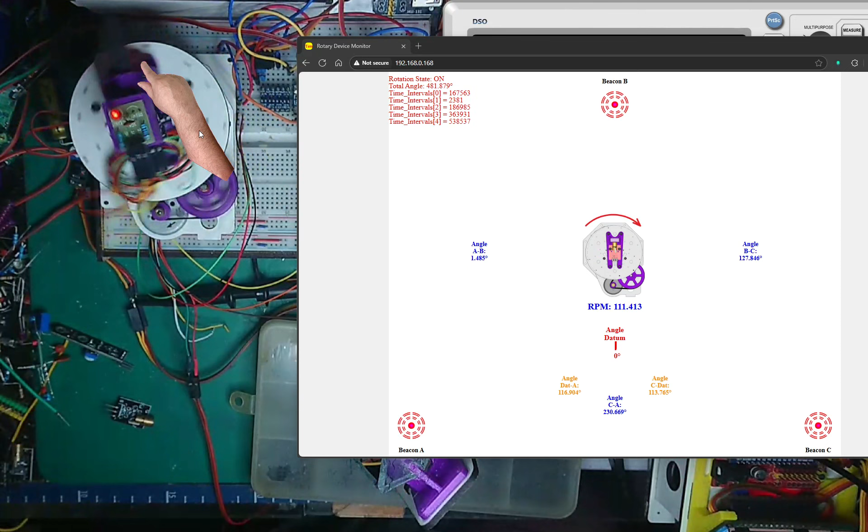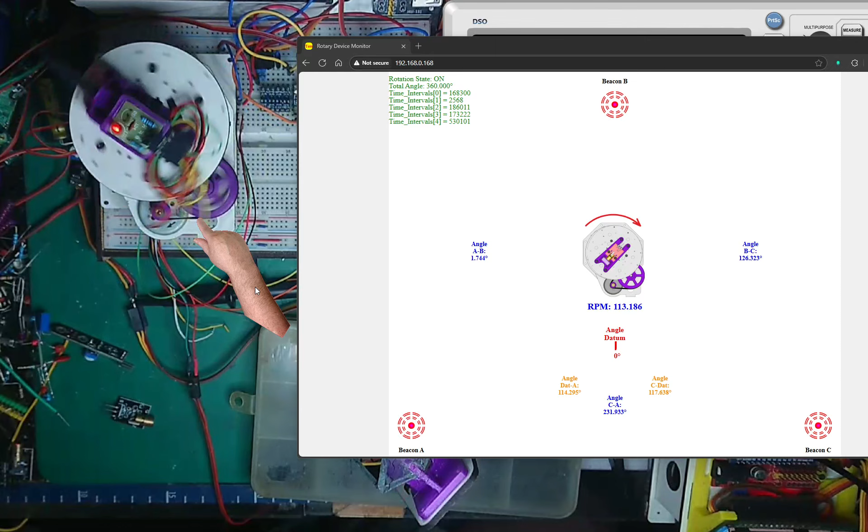And as I said earlier, I've got a rubber band here and a rubber band here, and what happens is as this rotates on my bearings, it gets a bit stiff and slack. I just knocked it up, you know, it's not precision built, this thing. So I am going to change the way this connects. I'm going to put a timing belt connection between the motor and the spinning thing, so that I don't get this bouncing of the rubber bands. They get tight and slack, and it upsets the timing, and it doesn't always give the correct result. These three don't add up to that fourth one, so I need to sort that still, so I'm still working on it.

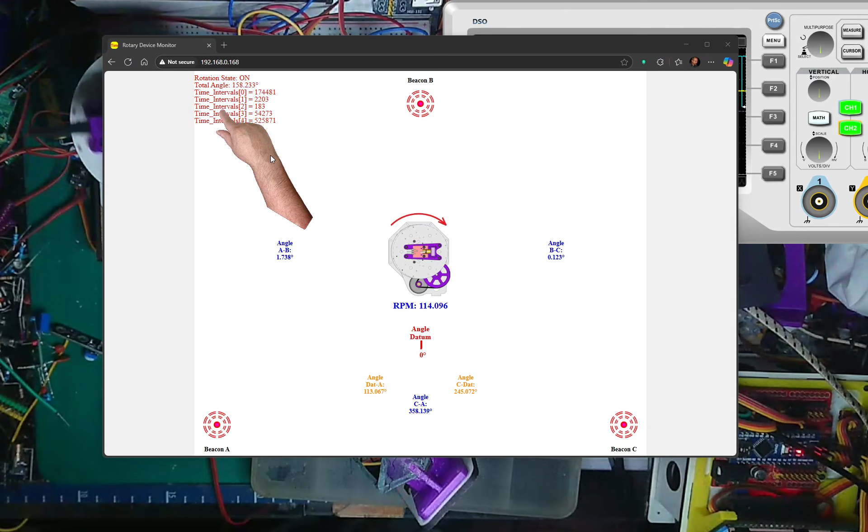When it doesn't bounce around, I've made it so this shows green, and it gives me the angles.

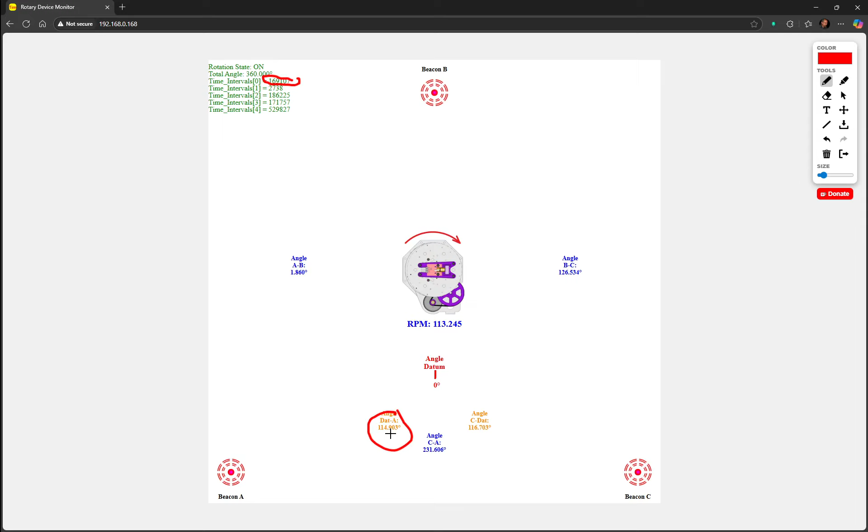Let me just show you what's happening. So what I can do is, if we get that up, these, let's have a look. Yeah, on that one, let's have red. So this value here is this value, so this value is that time converted to angles, and then I've got this.

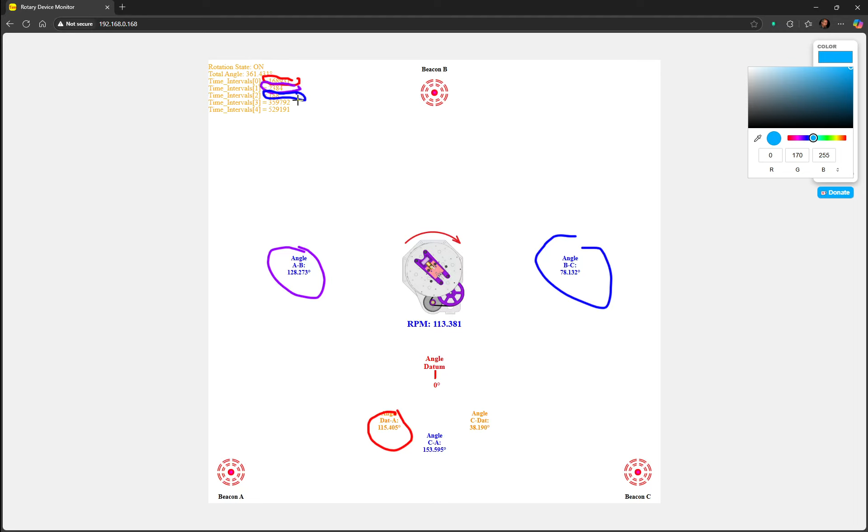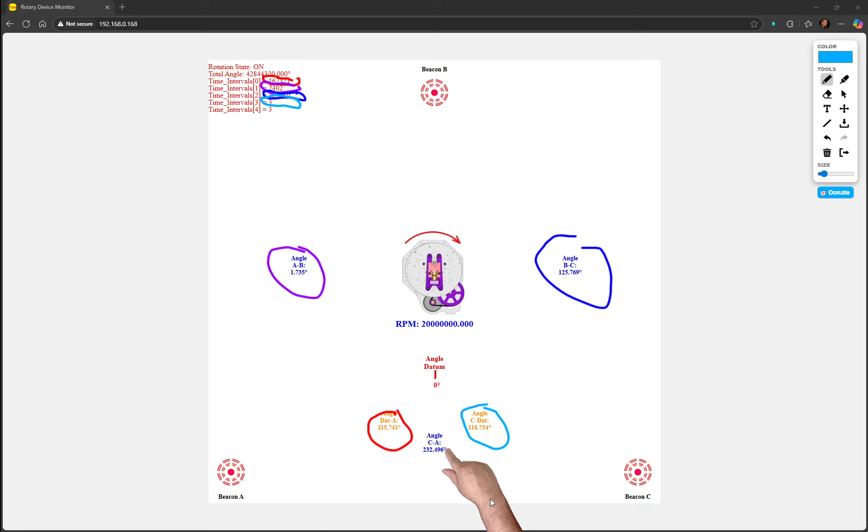Let's have a look. I've got this value, which is converted to angles, and I have this value here, which is this one converted to angle, and then we have this value, which is this angle here. And so this angle, and these two angles, well, actually these two angles should add up to this angle, so that gives me the angle between these two beacons there. This angle is between these two beacons, and this angle is the angle between these two beacons. But all these angles here should add up to this one.

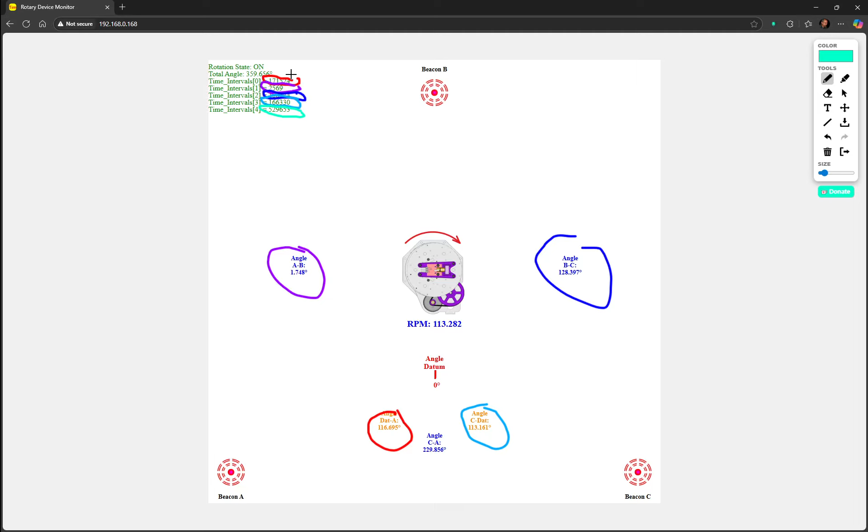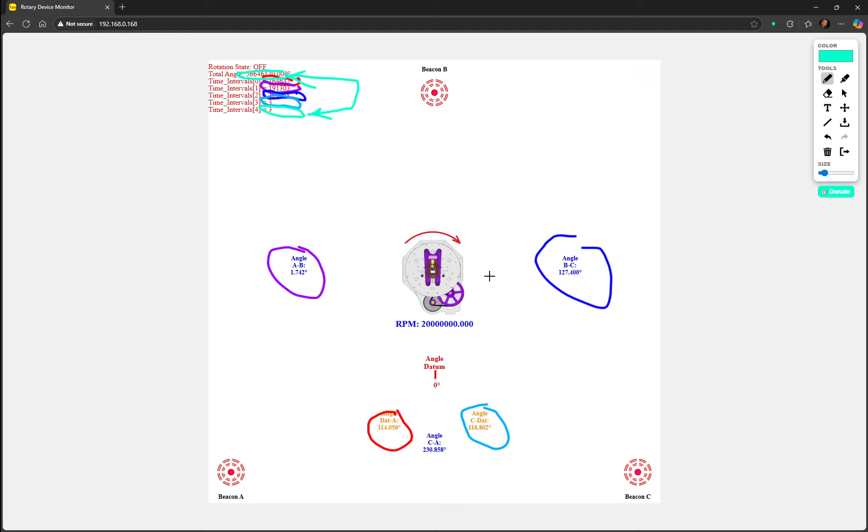So all them angles should add up to this one here. So if I add all them three together, it gives me this total here, and so that total and this total should be the same. And if they're not, then I just don't use them. When they are the same, then I use them, and this goes green. So this then gives me the angles I am looking for, which, if you've watched my friend's Instructable, is how we define the position of the robot using those angles in between those beacons.

So I hope that... how do I get out of that? There. So yes, so that is. I've gone for the web page. My friend has gone for the processing software. But either case, all the hard work should be done on the actual PC that's actually viewing the thing.

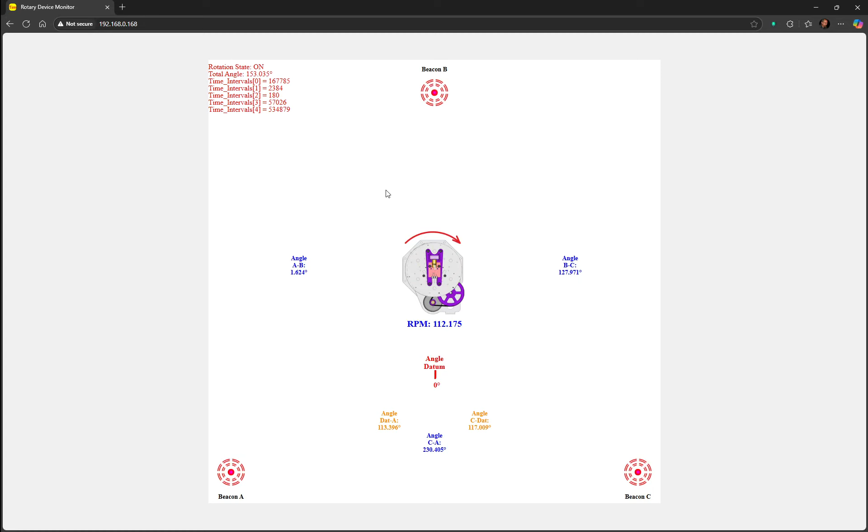So I hope the long delay and me ranting, trying to explain what I've been doing... let's see if I can get that web page down here. Yeah, so basically this is what I've been doing for the last month, trying to get this right, and I've still got a bit of work to do.

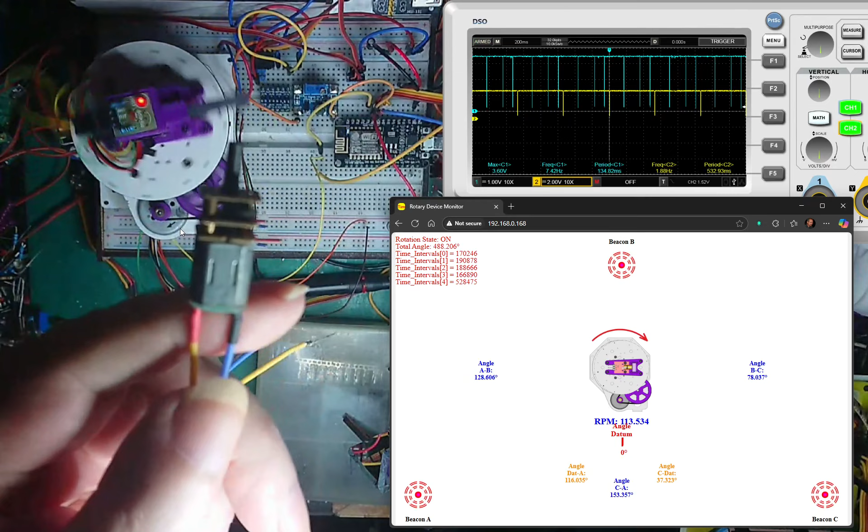Like I say, I need to redesign my rotating platform. I'm going to change this motor. What I'm going to use instead is the same as what my friends used, one of these motors instead. Let's just zoom in on that. No, that were rubbish, I'm making a really bad job of that. Yeah, so these are, I think these are great motors. You can get them at different voltages, different speeds, yeah, which is great.

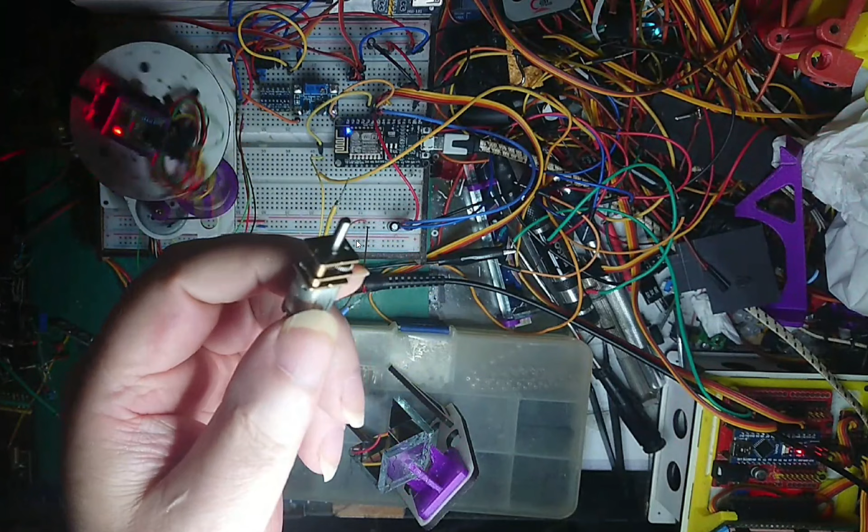So let's just bring everything else back, so we've got a nice picture. There's my web page, yeah, that looks cool, doesn't it? So what I'm doing is very similar to my friend's Instructable, but we've gone slightly different ways to it. I hope some of this made sense to you, I hope some of you liked it, but I just thought I'd do a video. Sorry it's so long, because it's been quite a while since I've made a video.

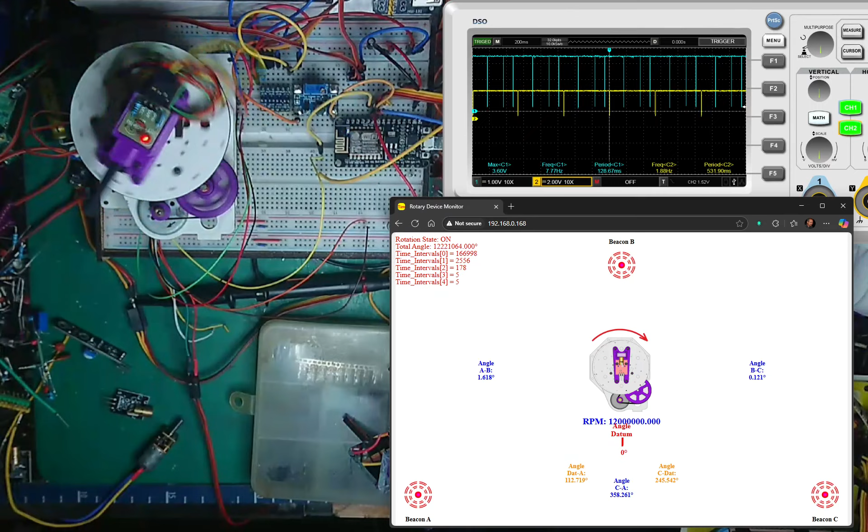Yeah, there's nothing more to say. I don't think I've forgotten anything else. I'll tell you what, I'll just pause it. No, I couldn't think of anything else. I've just changed the view of the... oh, it looks horrible, that. Yeah, so you can see how it's running in real time.